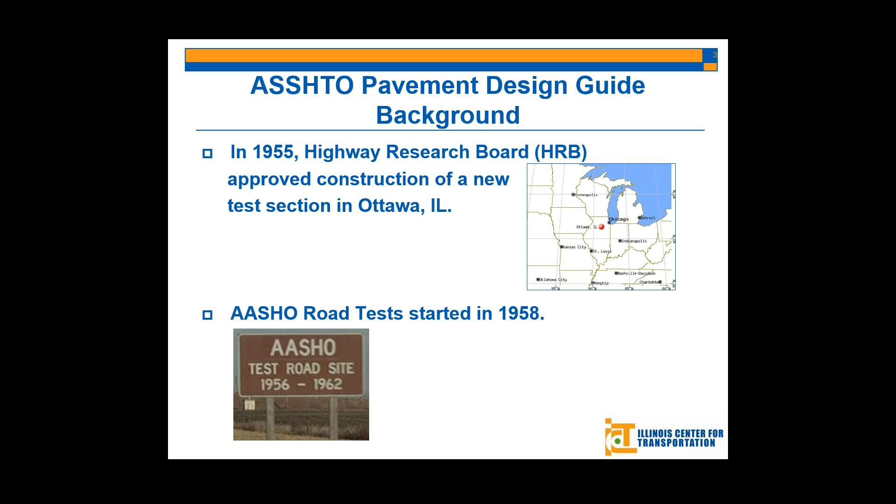Until the mid-20th century, the world was lacking published and comprehensive pavement design guidelines. Because of this, the Highway Research Board approved construction of a new test section in Ottawa, Illinois in 1955. Ottawa is north of Rantoul, somewhere between Rantoul and Chicago. This test section was opened to traffic in 1958, and testing started at the same time. Four design guides were developed based on the AASHO road tests.

The first design guide was the '61 interim guide. They then revisited and reviewed the '61 guide and published another one in '72. They again modified the equations given in the '72 interim guide and published another pavement design guide in '86 — so there were modifications between these three. For example, in '86 they started considering resilient modulus for subgrade in pavement design. Finally in '93 they finalized this and published the '93 AASHTO pavement design guide, which is still popular throughout the world and still used in a number of states in the United States.

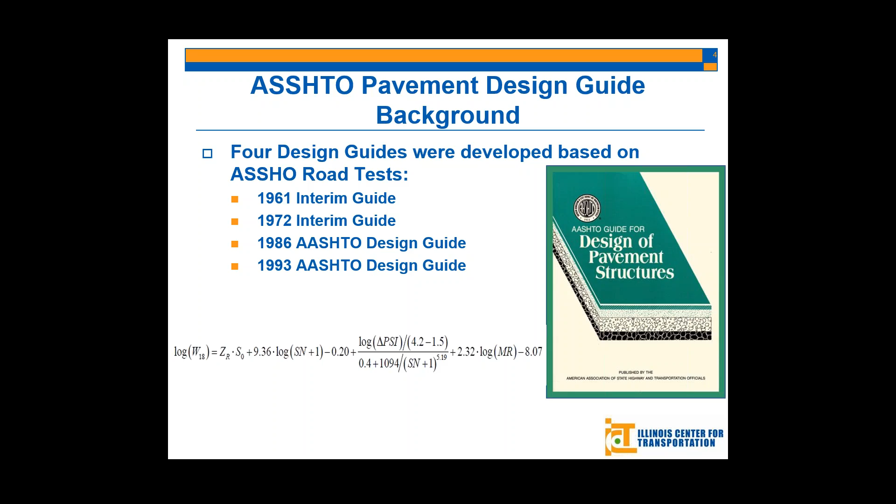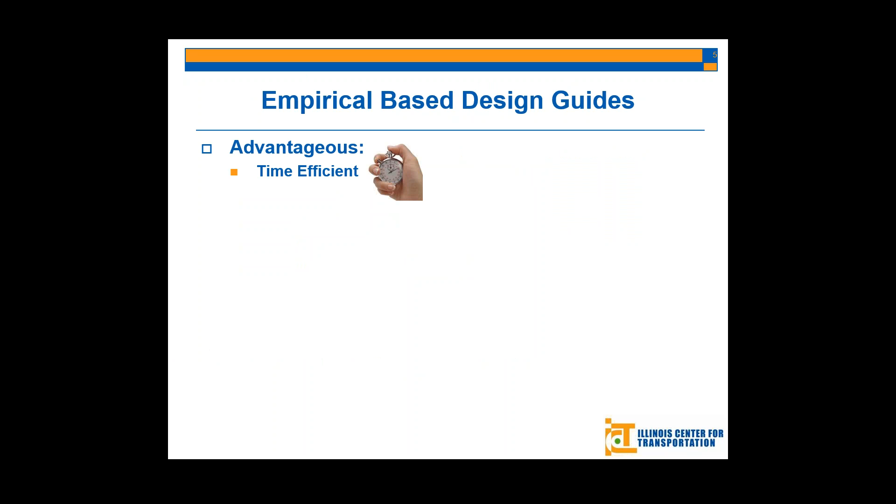So what are the advantages of using empirical-based design guides? First, they are very time efficient — you have only one equation, and considering the computer power we have today, it's very easy to solve. Second, they are very easy to implement and use, since there's only one equation with a couple of inputs.

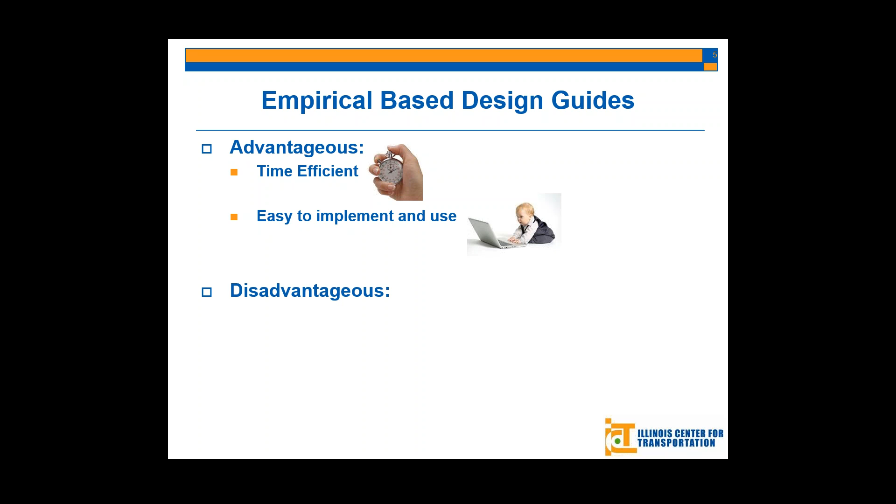But what are the disadvantages of these empirical-based design guides? Why are we trying to switch to mechanistic-based design guides? The reason is that they are applicable only to conditions similar to those for which they were developed. For example, if you conduct tests in one particular climate zone and want to make a new design in another climate zone, you are sort of doing extrapolation, which we want to avoid when doing pavement design.

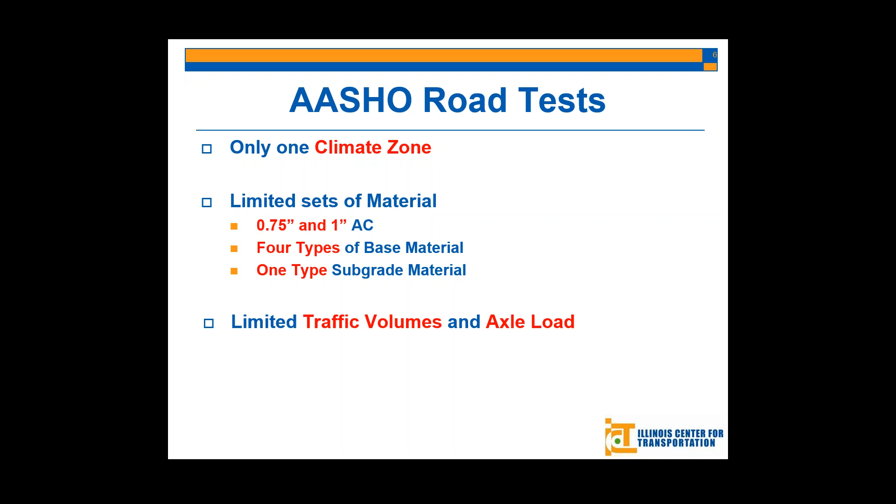Now I'd like to talk about the conditions that existed in the AASHO road tests. Obviously, it only considers one climate zone, the Illinois climate zone, and a very limited set of materials — only 0.75 inch and 1 inch asphalt layer thicknesses. When you consider the pavement designs we use today, you can tell we are extrapolating a lot. They also had only four different types of base material and only one type of material for subgrade, which was, I believe, A6 or A7, along with limiting traffic volumes. When you compare traffic volumes back in the 1960s to what we have now, there's a really big difference. Axle loads have increased, and new tire technologies have emerged — now we have wide-base tires in addition to dual tire assemblies, totally new construction methods, and so on.

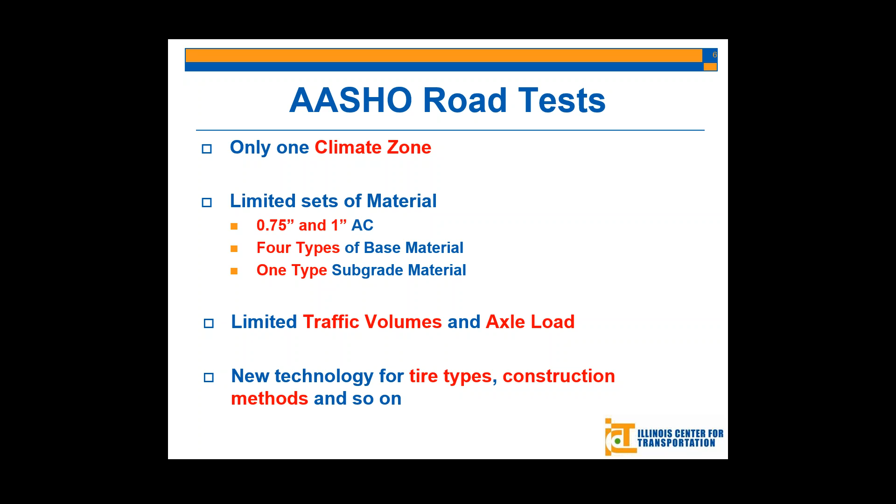This road test basically shows that the conditions in actual road tests were very limited, and most of the time that we are designing new pavement using this empirical based method, we are doing extrapolation that we want to avoid.

After this, new projects 1-40A, 1-40B, and 1-40D reviewed and revised the MEPDG, which resulted in new pavement design software, later known as Darwin ME, and an improved version of the existing MEPDG design guide called MEPDG and Manual of Practice. This design guide is mostly developed for developing computer software.

Finally, in August 2013, they changed the name to the AASHTO Pavement ME Design Software instead of Darwin ME. I'm hoping that they're going to stick with this name.

So after giving the brief history about MEPDG development, now I would like to talk about MEPDG itself. MEPDG stands for, as I said before, Mechanistic Empirical Design Guide. Mechanistic means that we are solving the pavement system by using theories, and then we are calculating the distresses by using some empirical equations.

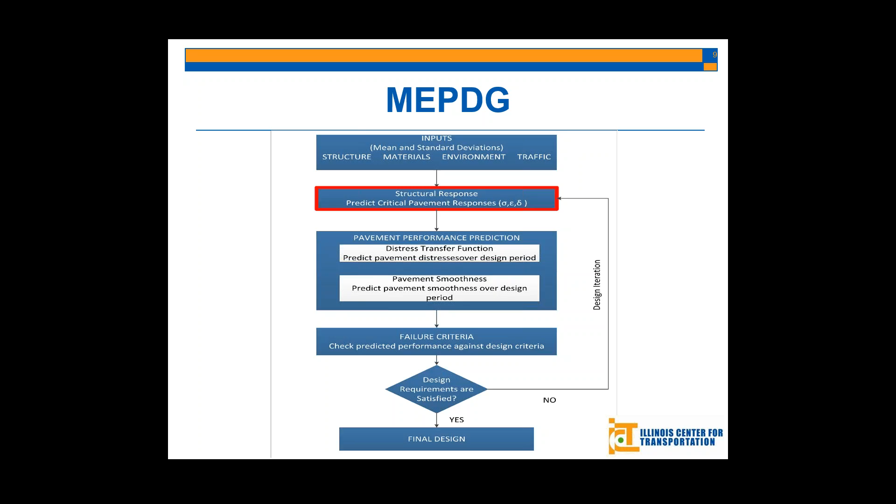MEPDG has really theoretically sound and grounded methodology and procedure to compute the structural responses, but still it has some limitations and unrealistic assumptions, which may lead to inaccurate response calculations. Before talking about the limitations of MEPDG, I would like to explain the mechanistic part of the design guide, how it works for flexible pavement, of course.

First, it starts with subdivision. Basically, you give your pavement structure to MEPDG - for example, 3 inches of AC layer, 6 inches of base layer, and so on - and it subdivides it into smaller pieces. The reason for this is to account for the temperature and aging gradients.

After this, dynamic modulus is calculated at the midpoint of each sub-layer, considering frequency and temperature. I would like to take your attention to the wording I have been using: the aging, frequency, and temperature. This should remind us of the term viscoelasticity, which means MEPDG recognizes the fact that asphalt concrete shows viscoelastic properties.

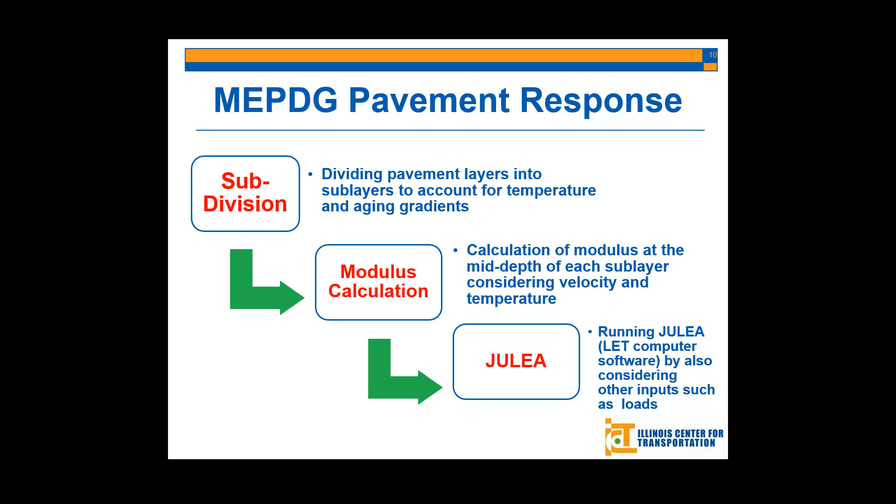After having our subdivided pavement structure with calculated modulus, it runs to JULEA, which is a linear elastic theory computer software - just like BISAR, just like KENLAYER, and so on - also considering other inputs such as loads. So the mechanistic part of the design guide is not only running JULEA; it subdivides, calculates the dynamic modulus, and after this, it runs JULEA. It has a really well and theoretically sound procedure to calculate pavement responses, but still it has some limitations.

I will talk about the limitations of MEPDG by comparing it with finite element analysis. First, analysis type: I said MEPDG implicitly considers viscoelasticity, but still it runs JULEA, which is linear elastic software, and it doesn't consider the motion of the tire. Basically, it assumes that the tire is steady and not moving, which is not real, of course.

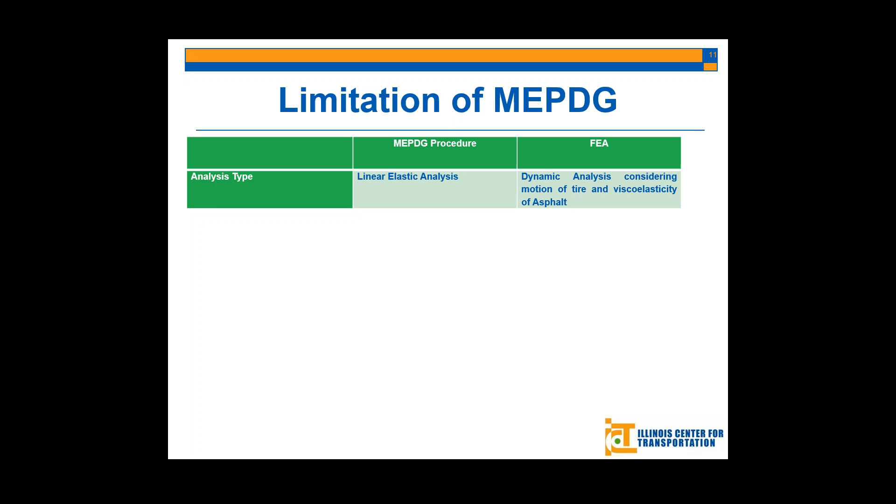As for tire type, because of the contact area it assumes, it can only consider a dual tire assembly - it cannot capture the wide-base tire effect on contact stresses. Contact stresses: it only assumes 2D uniform pressure, but in real life, the tire applies 3D contact stresses in vertical, longitudinal, and transverse directions, and these stresses are non-uniform. The contact area in MEPDG is assumed as circular.

Basically, it's calculated by dividing axle load by tire pressure. But in finite element analysis, our contact area is true measured tire contact areas.

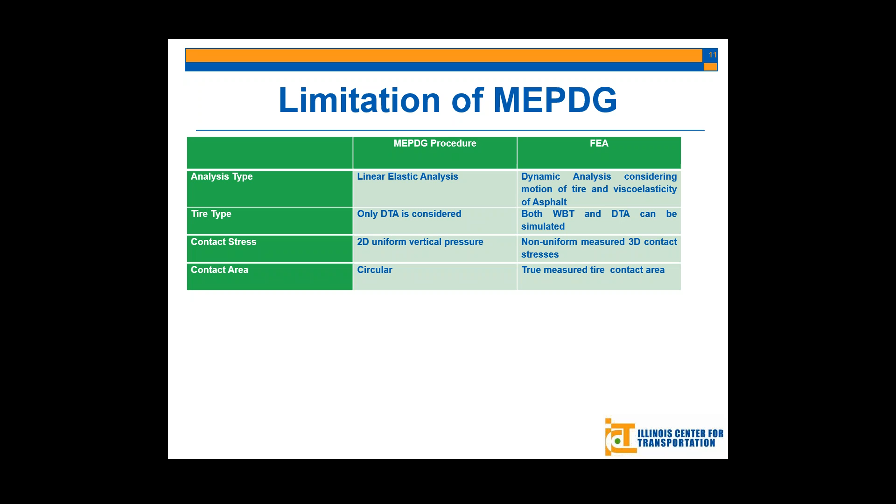Friction between layers in linear elastic theory: the MEPDG procedure assumes a distributed spring model to model the interaction between the layers. But in finite element analysis, we use an elastic stick model, which is able to simulate what is really happening at the interface between the layers.

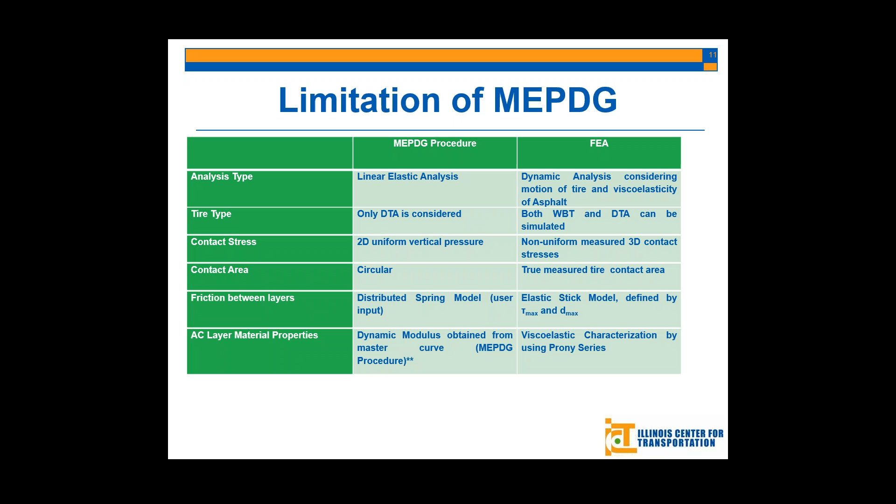Finally, the AC layer material properties also use a master curve, but to get the complex modulus you have to calculate the frequency, and MEPDG has a procedure to calculate frequency of loading. But as proved in two of Professor Al-Qadi's papers, this procedure to calculate loading frequency has some limitations, which result in up to 140% error.

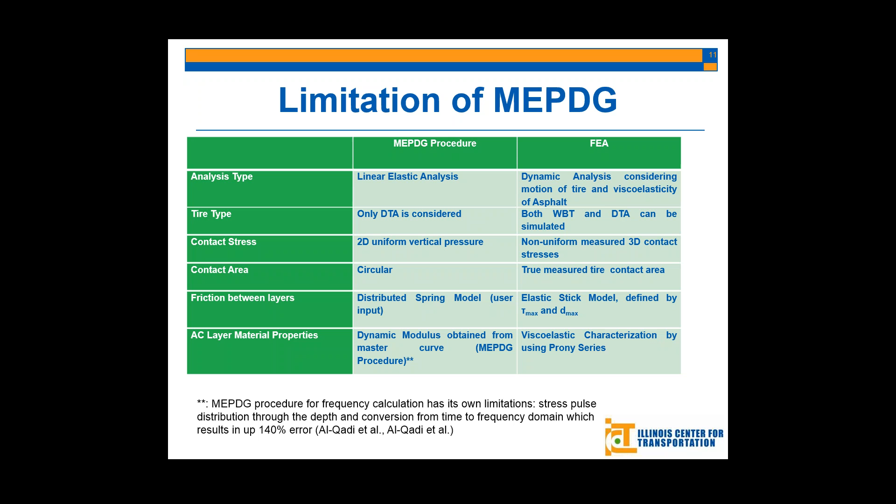So until this point, I tried to explain why we need to modify the mechanistic part of the pavement design by explaining the limitations of them.

Based on what I have just said, the objective of this study is to develop adjustment factors which modify the pavement responses obtained from the MEPDG procedure, in accordance with the results from finite element analysis, where we believe we model the tire-pavement interactions more realistically in terms of loading conditions and material characterization.

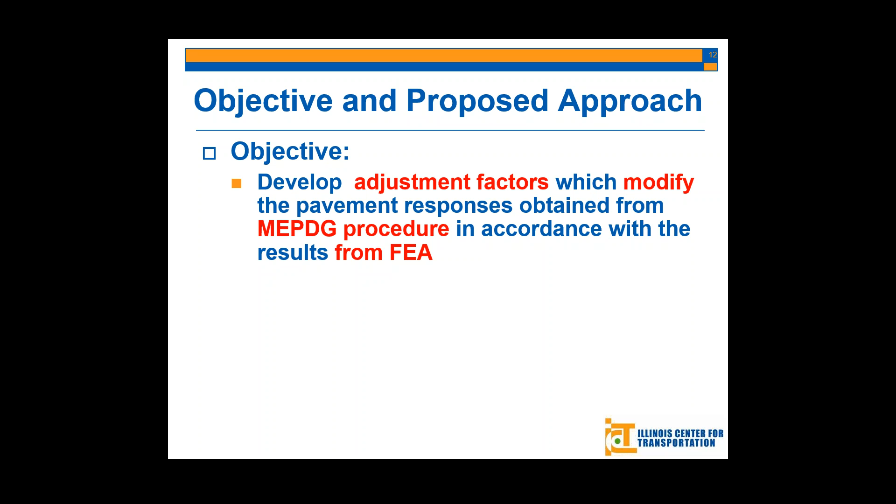Our approach divides the limitations into two groups: one for the model complexity regarding material characterization and loading condition, and the other for the incapability of simulating wide-base tires.

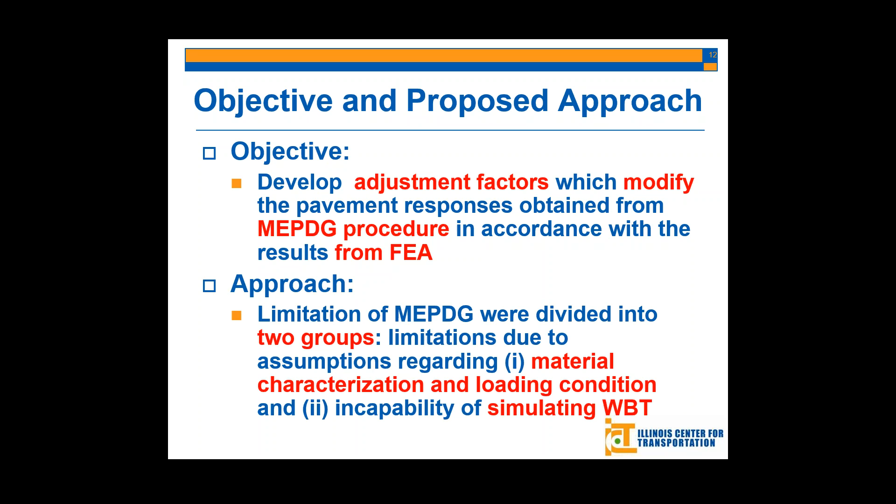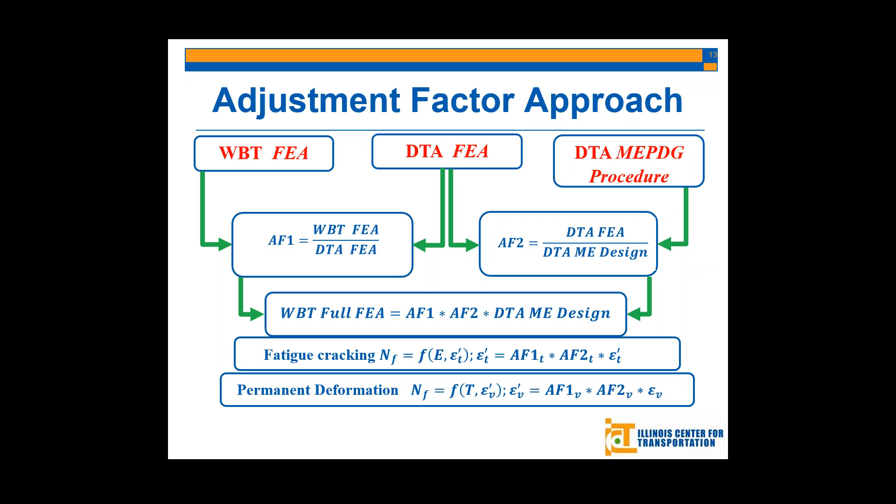Now I will start talking about the development of each adjustment factor, and share the discussions and results.

Before talking about adjustment factor one, I would like to take a moment to thank my research colleagues, Jaime and Angeli, because the finite element analyses were run by them.

I only implemented MEPDG and ran those cases in the MEPDG procedure.

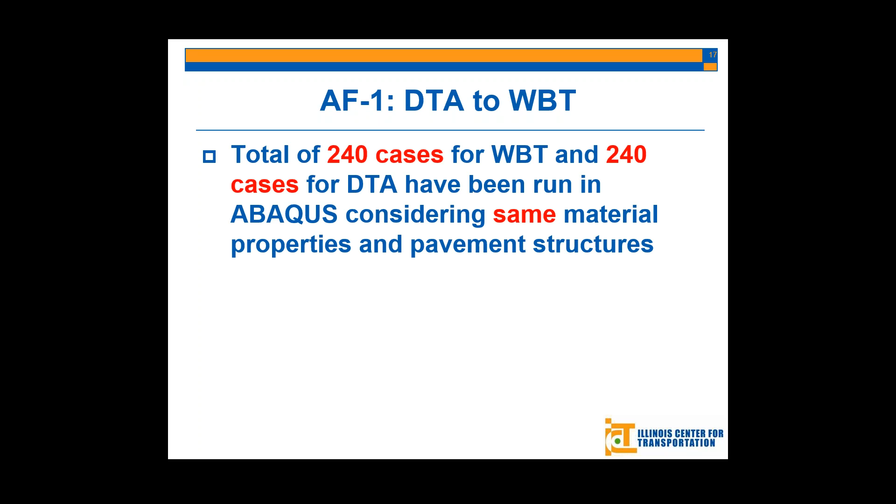A total of 240 cases for wide-base tire and dual tire assembly have been run in Abaqus, considering the same material properties and pavement structures. The only difference between these two cases is the contact stresses and contact areas, which were again measured under the same axle load and tire pressure.

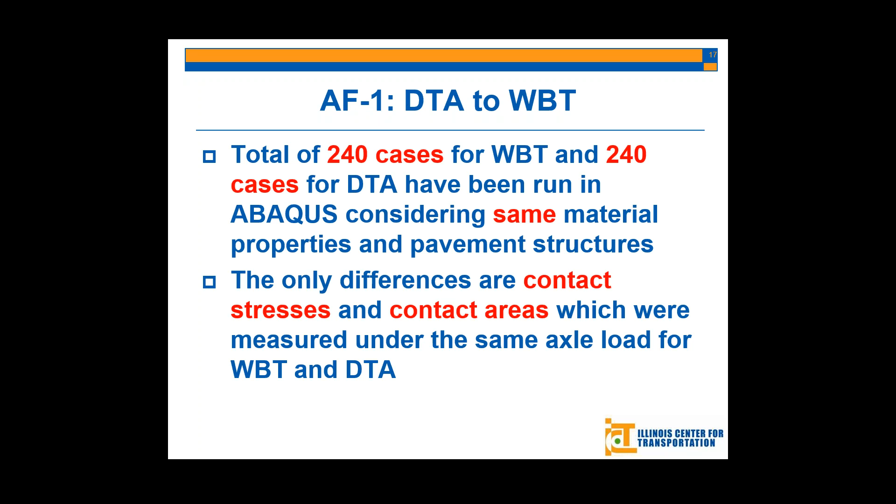Why do they result in different contact stresses? Because of the structural difference between dual tire assembly and wide-base tire.

We developed adjustment factors for a total of 8 responses: compressive strain within each layer, tensile strain at the bottom of AC, and shear strain within each layer. But because of time limitations, and for the sake of brevity, I will only be showing 4 of them.

This is transverse strain at the AC surface. The y-axis shows the wide-base tire, the x-axis shows the dual tire assembly. Here we have two lines: one orange, the other green.

The orange line is basically the unity line; it shows y equals x. I put this line to give you an idea of how significant it is to apply a correction factor on the response. In other words, this gap, this difference between the two lines, is the interpretation of the coefficient of x here.

So what I'm saying, for example, if you check the coefficient of x, you will understand that the wide-base tire is generally resulting in higher responses than the dual tire assembly, by a factor of about 1.5.

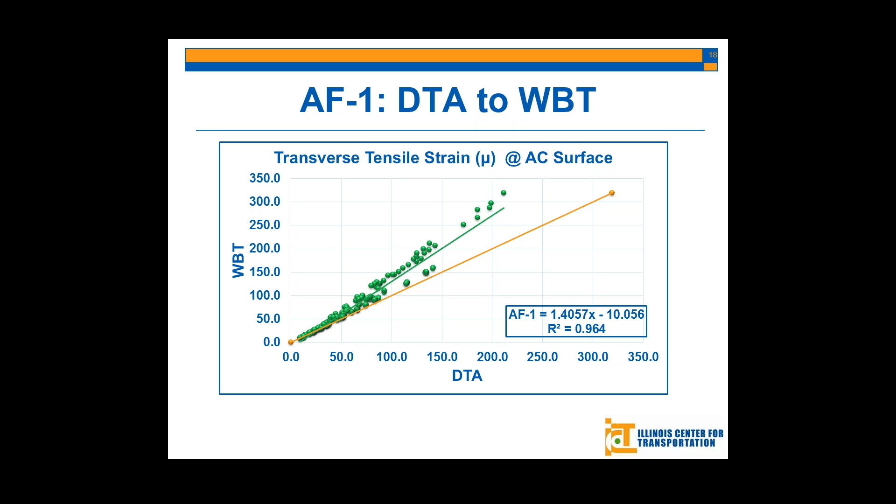This is because when you go deeper into the pavement, the effect of non-uniform tire contact stresses diminishes, and the axial load becomes the governing factor in responses. That's why we are getting higher and higher correlation between these two data sets, and the coefficient of x also decreases as we go deeper.

Again, the reason behind it is that when you go deeper in the pavement, the governing factor in responses becomes the axial load, which is the same for both cases. What differs between the two is the contact stress distribution, which loses its effect as you go deeper in the pavement.

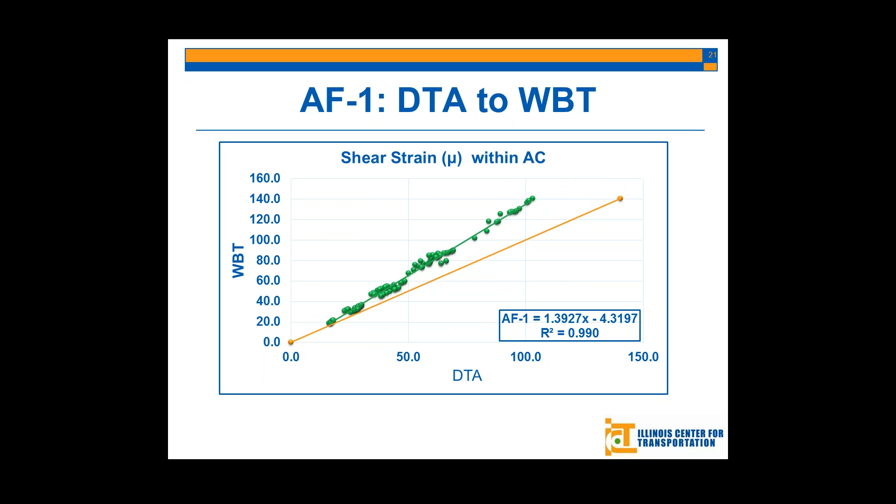And this is another demonstration of what I just said. This is the shear strain within the AC, which occurs 1 inch below the surface, and as you see, the correlation values dropped down, and the coefficients of x increased, comparing the compressive strain within the base. So this finalized my results about adjustment factor 1, which converts dual tire responses into the wide base tire responses.

Now I will be talking about MEPDG adjustment factor 2, which accounts for the model complexity. For this adjustment factor, only dual tire cases are considered, because once again, the wide base tire effect cannot be captured by the MEPDG.

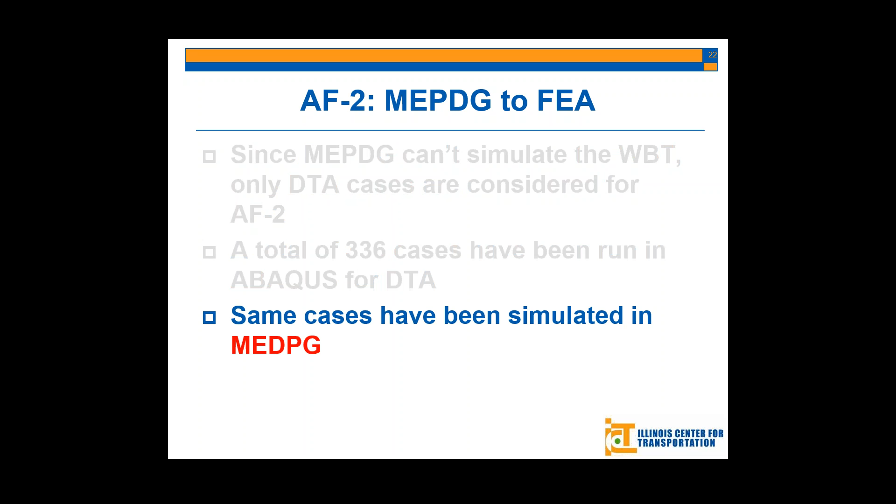A total of 336 cases have been run in Abaqus for dual tire assembly, and the same cases have been simulated in MEPDG. Here I want to say that running the same simulation in finite element and MEPDG is very important for the accuracy of this study, because we want to have consistent input between these two approaches so that we can compare apples to apples.

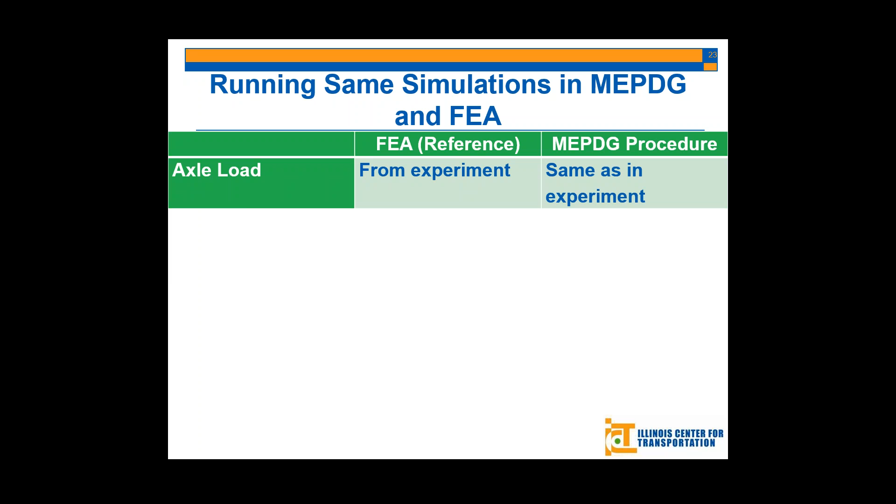What I am saying, for example, we have to apply the same axle load in finite element and the same axial load in MEPDG so that we can compare the results and come up with the adjustment factor. For axial load, when we are measuring contact stresses, we apply axial load and tire pressure, and we use this axial load and tire pressure as input in MEPDG. Contact area, for finite element analysis, is measured, and for MEPDG it's basically calculated by dividing axial load by the tire pressure.

Motion of tire: in finite element analysis, we are moving the tire at a velocity of 5 miles per hour, and we are considering the exact velocity when calculating complex modulus in MEPDG. Temperature: we use basically the same temperature profile in both finite element analysis and MEPDG.

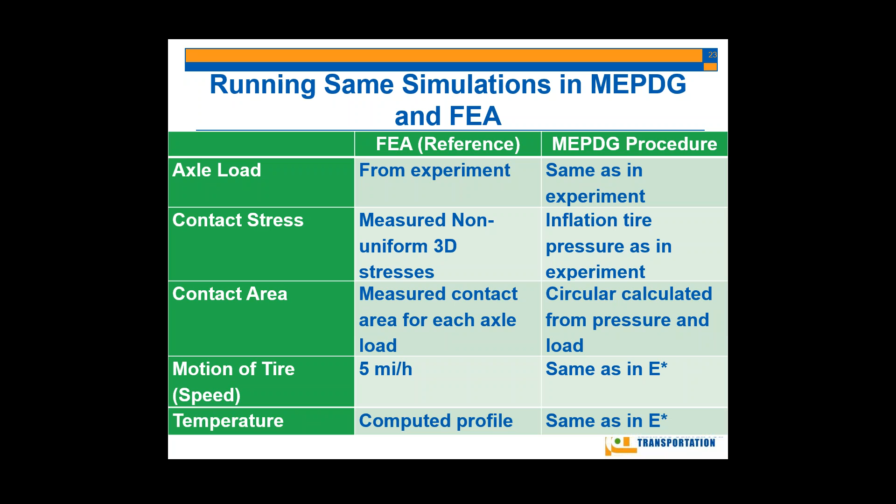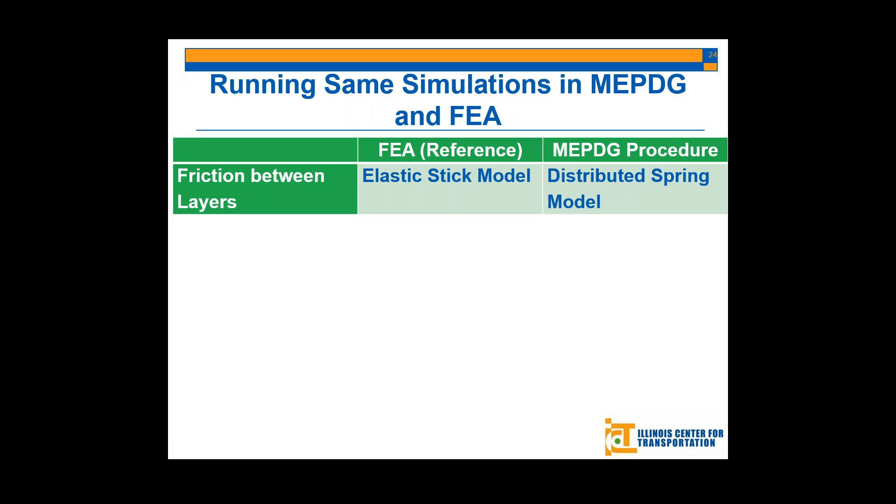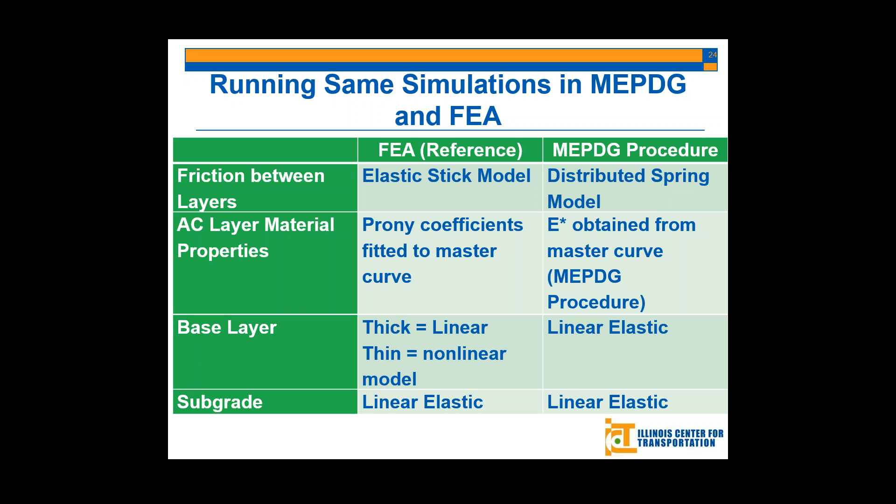That was the hardest conversion that I faced, converting the elastic stick model into the distributed spring model. I don't want to go into the details, but if you want, we can discuss it after the presentation. And the material properties, basically we use the same master curve and same linear elastic moduluses for base and subgrade.

So I was able to convert the finite element inputs to MEPDG, but the problem was I had two choices. One was using the AASHTOWare software to get the responses, and the other was implementing the MEPDG as a standalone code in my computer using computer languages. I chose to implement the MEPDG procedure as a standalone tool because of two reasons.

First of all, running 576 cases in the software is time consuming and not feasible. What I mean by not feasible: if you use the MEPDG software, you will see that it considers truck types, axle load spectra, and so on. But for the sake of this analysis, all I need is applying one axle load and one tire pressure.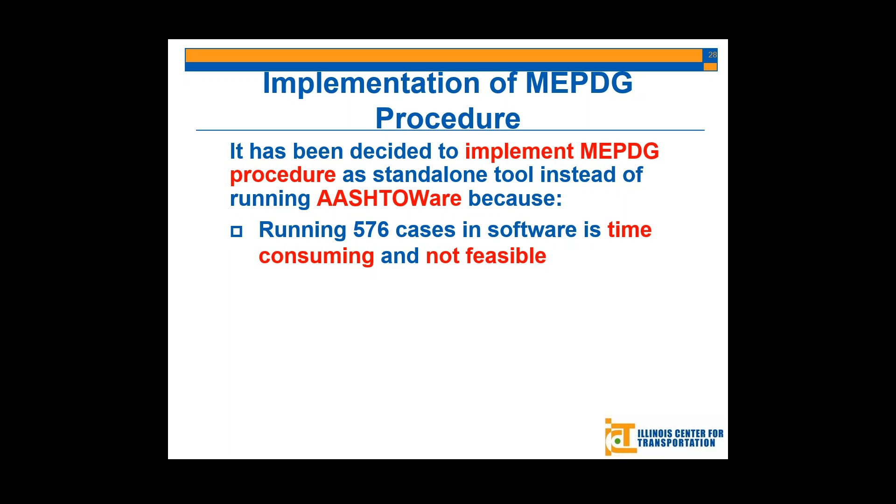So I don't need to go and get all this load spectra data for each truck type. And the second reason, which is more important, is that this software only gives the critical pavement responses used in transfer functions. However, we are also interested in other responses such as shear strain within the AC pavement layer, because it is believed in the literature that vertical shear strain might be the main cause of top-down cracking instead of the tensile strain at the AC surface.

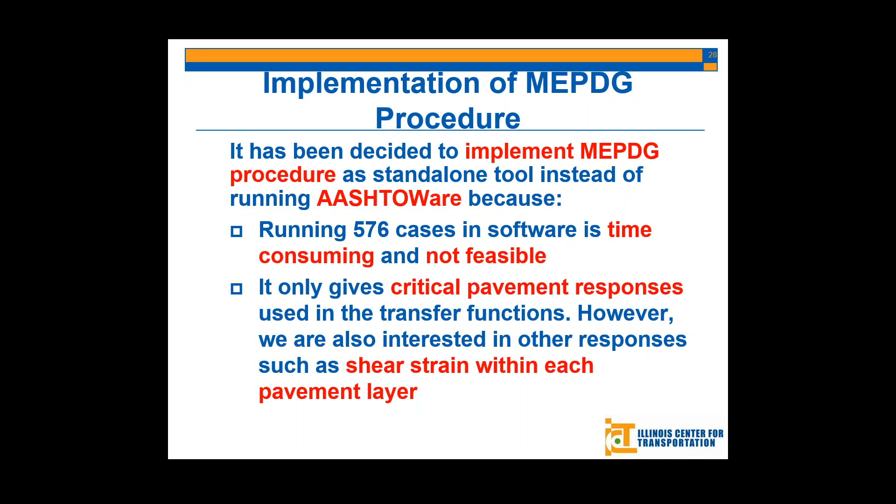So I implemented MEPDG as a standalone procedure tool, and I ran the simulation, and I faced some issues. The issues were differences in loading conditions, and in general the model introduced serious challenges that complicated the development of adjustment factor 2.

To obtain a statistically good correlation for adjustment factor 2, the cases were divided into thick pavement, thin pavement with strong base material, and thin pavement with weak base material. Now I would like to remind you that when I was developing adjustment factor 1, I didn't group the responses based on pavement structure like thin pavement, or based on material characterization such as strong and weak. But for developing adjustment factor 2, I had to do that because of the challenges introduced by the differences in models.

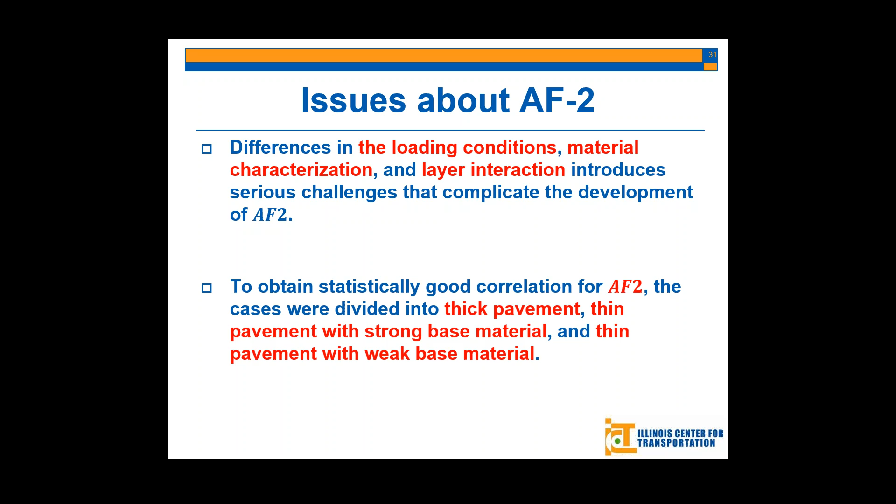Now I will show the adjustment factor 2 results. Again, I have in total like 30 plots for this adjustment factor 2, but I will be showing 4 or 5 of them.

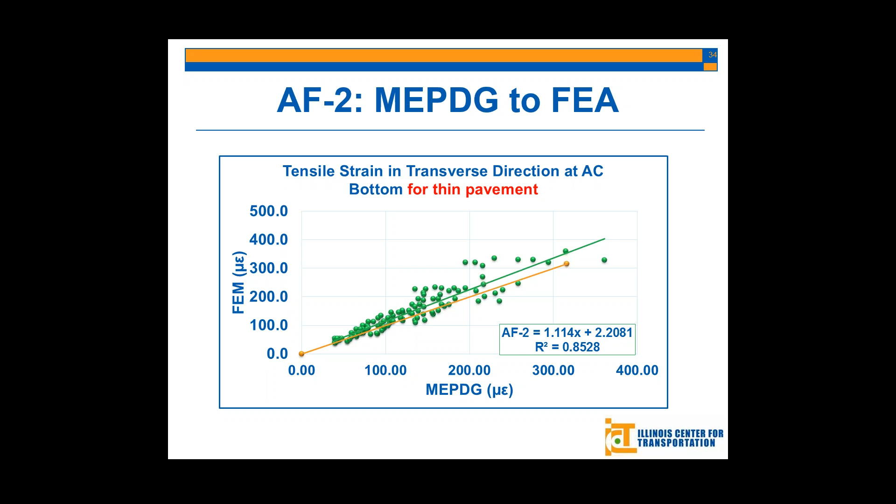Tensile strain - I have a very similar case for the thin pavement. The previous one was thick pavement, and this one is for thin pavement, and pretty much the same trend is observed. The only difference is a lower R-squared correlation value, again due to the effect of non-uniform contact stresses. This is the compressive strain within the base for the thick pavement. I have a relatively higher R-squared value here, because the governing factor in this response is axle load rather than contact stresses.

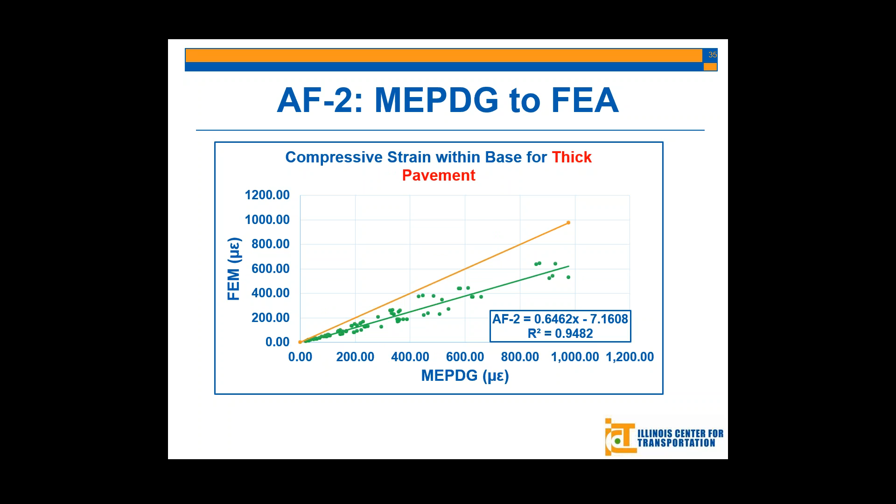This reminds me to mention something about our finite element analysis. For the thick pavement, we consider the base as a linear elastic material. On the other hand, for thin pavement, we consider it as a nonlinear material. I'd like to draw your attention to the coefficients here - before it was 0.65, meaning MEPDG resulted in higher responses than finite element analysis, but here it's 4, meaning finite element analysis results in 4 times higher responses than MEPDG. This also matches the literature, which states that considering the base as a nonlinear material results in higher responses compared to treating it as only linear elastic. These coefficients show the significance of considering base material as nonlinear.

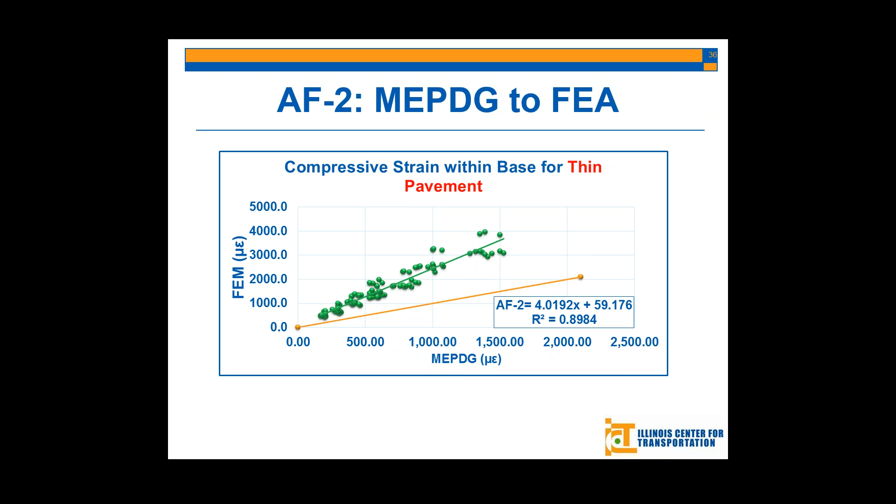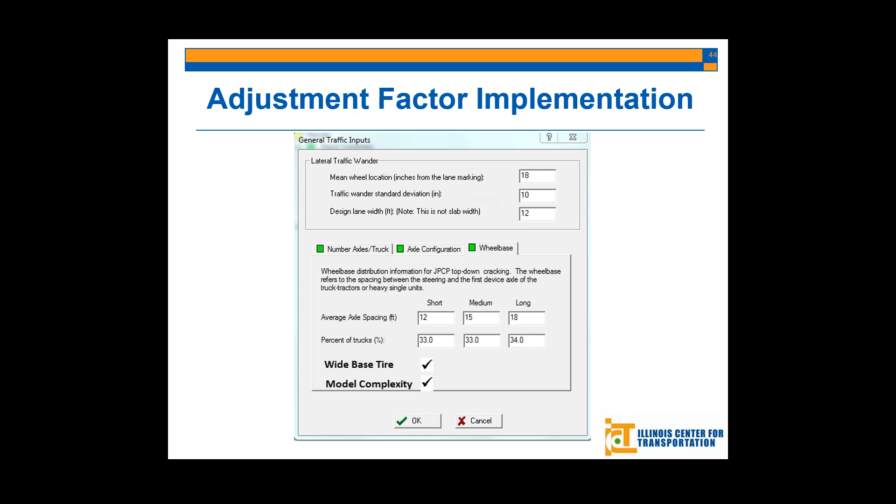Now I will quickly give my conclusions about my studies.

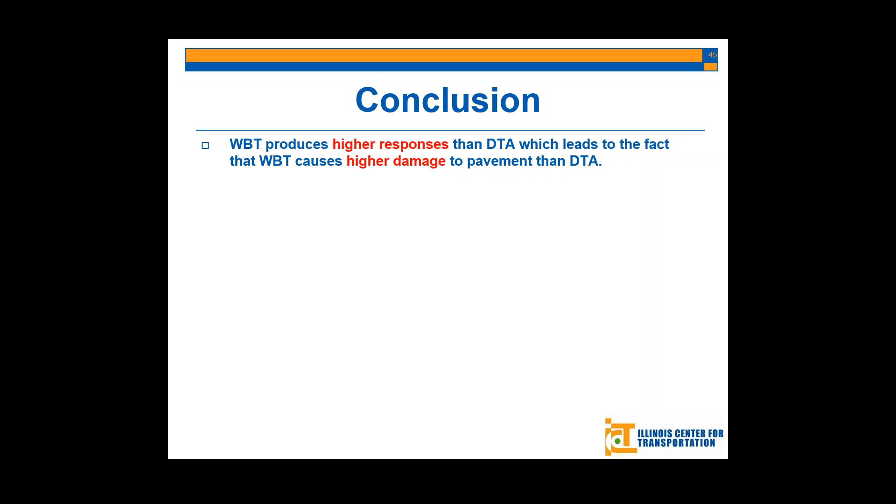We observed that for all the responses, wide base tire produces higher responses than dual tire assembly, which means that it gives higher damage than the dual tire assembly.

I don't know why it disappears. It doesn't disappear on my computer, but yeah, I can see it here. I don't know, it's fine, it's just the screen display. It's fine.

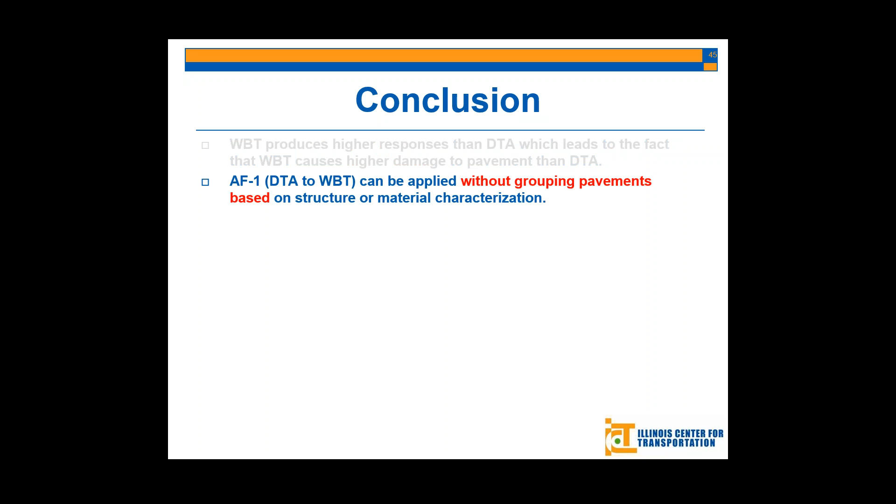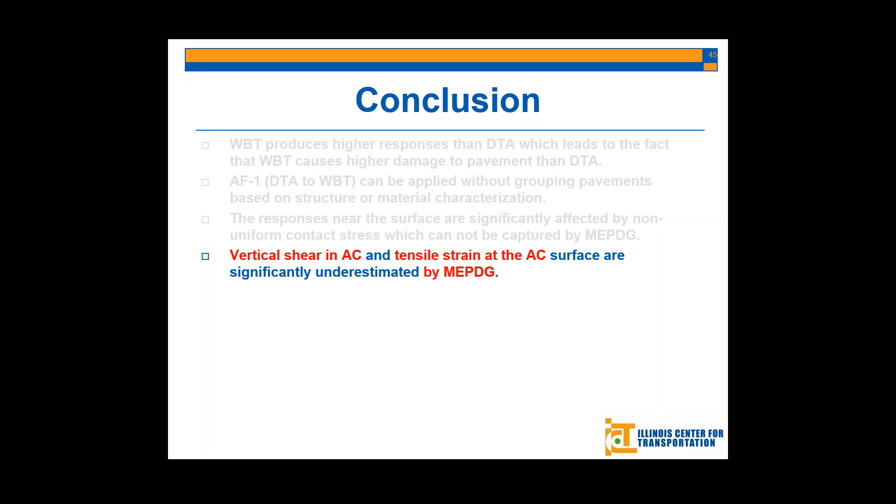Adjustment factor can be applied without grouping pavement based on structure and material because, as you see, I had very high correlation values. The responses near the surface are significantly affected by non-uniform contact stresses which cannot be captured by MEPDG. Vertical shear in AC and tensile strain at the AC surface are the responses which are significantly underestimated by MEPDG,

and these responses are important for us to predict top-down cracking. Considering nonlinear characterization for base material causes much higher responses.

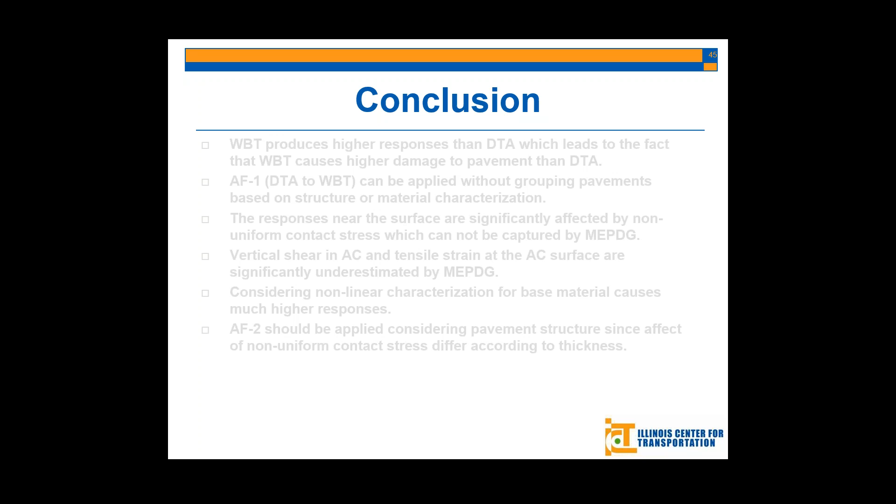And adjustment factor should be applied considering pavement structure, since the effect of non-uniform contact stresses differs according to thickness. I said this sentence maybe a thousand times, but it is really important for our studies. And if you have any questions, I will be happy to answer them.

I apologize if I was so fast. I don't know, it's my nature, I go so fast. Questions?

Yes, thank you, I have a couple questions. You only talked about transverse strain. Did you calculate longitudinal strain? Yes. For which case, Professor, specifically? Just in general, bottom of the asphalt longitudinal strain.

For wide base tire effect or model complexity effect? For wide base tire, it doesn't matter. Wide base tire always produces higher responses than dual tire assembly. And the strain's the same in both longitudinal and transverse? No, they are not. They are not the same.

So what's higher, transverse or longitudinal? I don't know. But you show... I guess maybe the plots you show are just a sample, is that what I'm understanding? Longitudinal, his question is... Okay, okay, that was my answer.

Okay, 'cause I always thought longitudinal was higher, and you're showing transverse. What's the answer again for everyone? I think, Erman, I don't think I can understand the question. Go back to it, it's been the beginning.

Why did you not present horizontal strains? I think the question is longitudinal. I mean, longitudinal strains, I selected like one strain at the bottom of AC. I didn't have a specific reason not to present longitudinal. Oh, okay, I could have presented it.

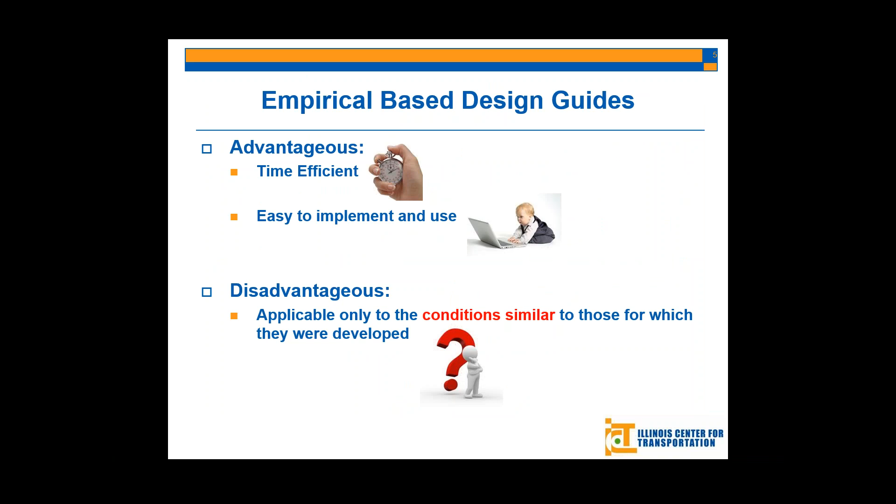Which one is more critical? Basically, MEPDG gets whichever is higher. It calculates both, and whichever is higher, it uses. Generally, you get longitudinal, but sometimes you get the transverse in some occasions. We have both, like in our project, but I didn't put everything here.

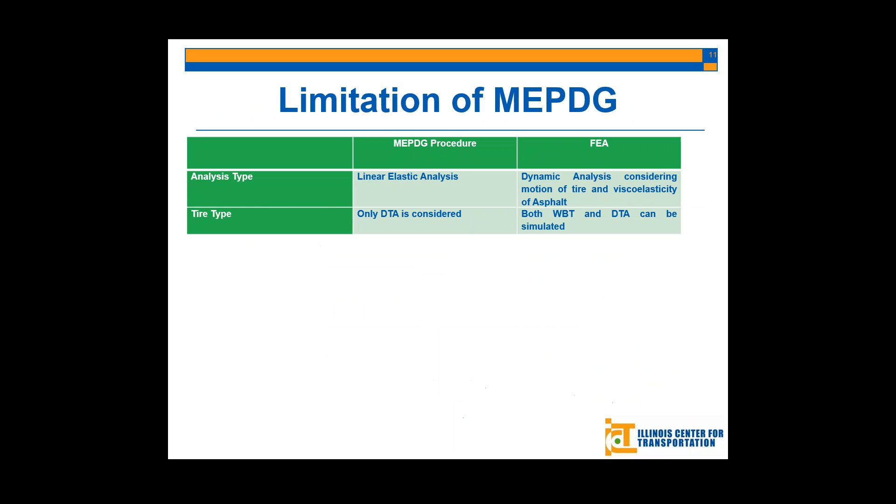That's fine, so you weren't just showing the worst case scenario, that's why I got confused. Oh, maybe, yes, maybe. Did you compare any of this with standard single row tires? No, we only did dual tires with wide base, yes.

So you were talking about the steering wheel? Yeah, or just any, maybe they don't have... We considered only dual tire assemblies, and we didn't consider wide base tire, which is a single tire in MEPDG, because we know that the contact stress difference caused by wide base tire cannot be captured by linear elastic theory.

So I don't know, what you're talking about is outside the scope of this research. Okay, what Michelin does, we have varying tire parameters for that, yeah. That answer, we did steering wheel, but it wasn't part of this work, yes. I guess the main emphasis then was how wide-based tire, as opposed to the traditional dual which is used in design calculations, right? Yes, it's comparing.

You have kind of a narrow scope right now. Okay, I did have one other question, sorry. You said the tensile strain at the surface was primarily not correct because of layered elastic numerical analysis, was that it?

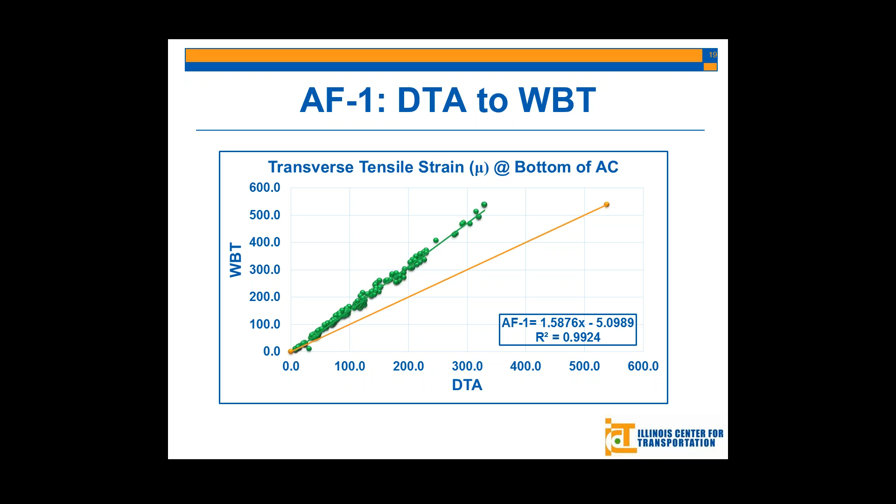So let me put the question in a different way, if I may. If you're going to have like a helicopter picture from the top here and look at it and say, okay, which one's going to be performing better, the thin pavement or thick pavement, when they are exposed to a wide-base tire? Thick pavement. And the reason?

First of all, thin pavement, as I showed, because of nonlinear characterization, it results in higher compressive strain in the base, which increases the rutting, which is one of the biggest problems. The comparison of tensile strain at the surface and at the bottom of AC is not as clear, because thick pavement results in higher response at the bottom of AC, but on the other hand, thin pavement results in higher responses at the AC surface. So, considering the compressive strain within the base, I would say thick pavement will show better performance than thin pavement.

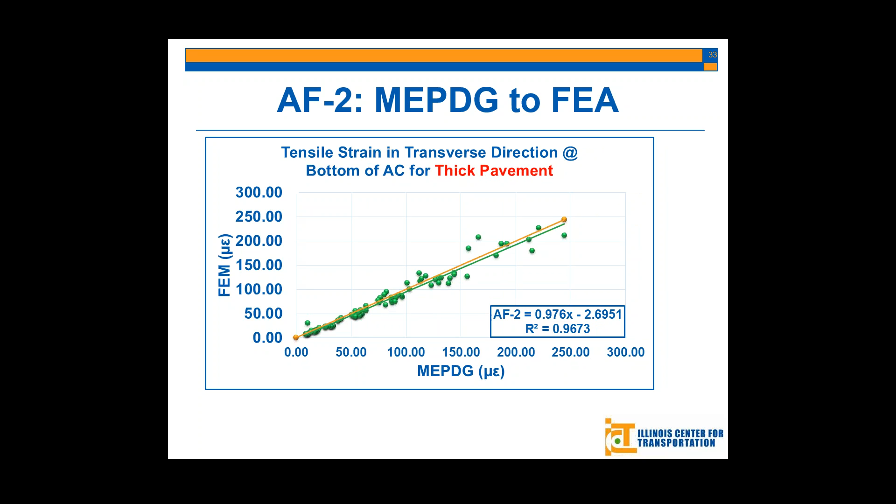There's a complete different structure for both tires. We are measuring the tire contact stresses, and that's what we are applying, and it's the same for thick and thin pavement. But remember, the contact stresses you have are different between wide base tire and dual tire. So what we are using is what we are measuring. Wide base tire in general has less tendency to have surface cracks and shear happening.

I would say, correct me Jaime, about 10%? You did a thick one. It's maybe 10% for the surface tensile strain and the vertical shear strain close to the surface. From all the previous ones, yeah, something like this. It depends, of course, on the pressure and the load and so on, but in general, I'm saying 10%.

One other thing, I guess, with all the dynamic finite element analysis and the detail with the contact stresses, how do you bring some of those conclusions into building or developing adjustment factors for MEPDG to take care of wide base? If you're basically counting all model complexities in one adjustment factor, there may be several changes needed to MEPDG. That's complete.

If I may, he touched on very important points from the beginning. First, that MEPDG uses the circular load, uniform pressure, all these things, so you cannot address them all one by one. That's why the idea of two adjustment factors: one for the wide base, and one between finite element and the elastic method.

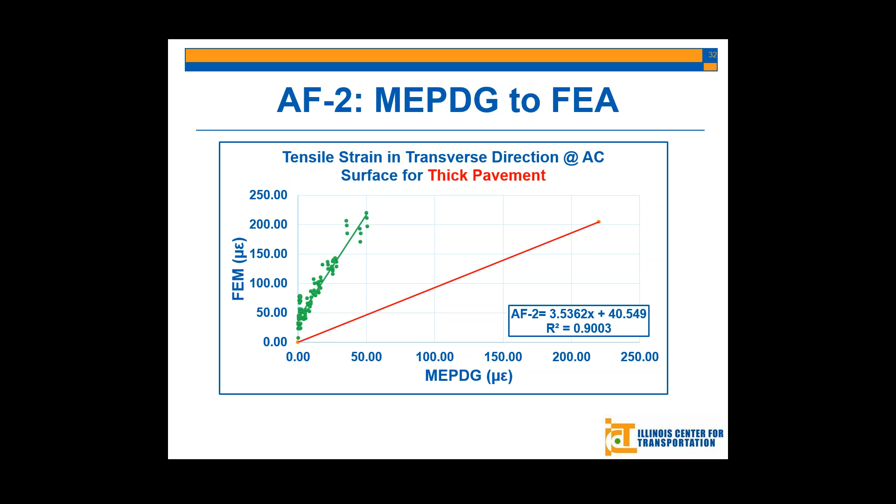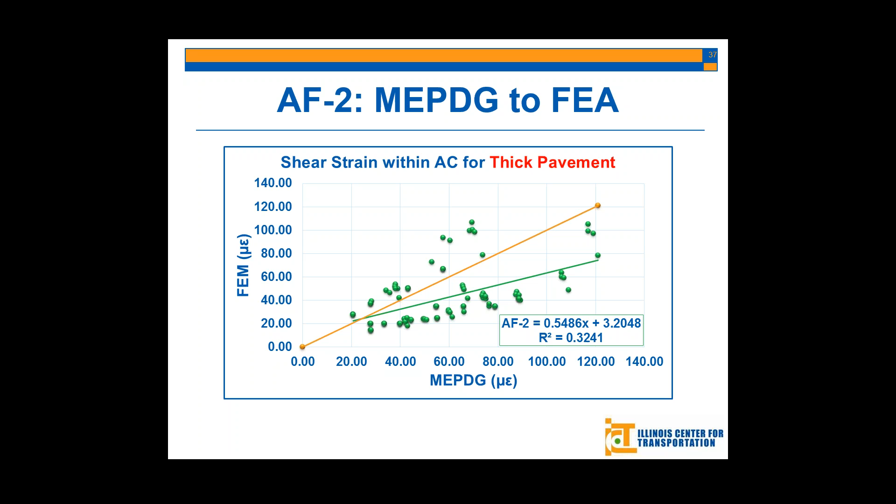So, any other questions? Just one thing of interest to you, Errol. Sure.

Erman was discussing this with me about a week ago. If you remember in the Tensar project, we were looking into the strain readings where, whenever you have a very thin pavement and very weak subgrade, the response we were getting was way, way more than what we expected from the finite element. You mean what we measured? Yes, and this kind of change diminished as we moved to a thicker pavement, even including the ones here at that time. The only explanation is, I don't know how much trust we can have in the strain gauge measurements on thin pavements over weak subgrade, because the gauge was bending more than stretching, and they weren't manufactured to bend. So anyway.

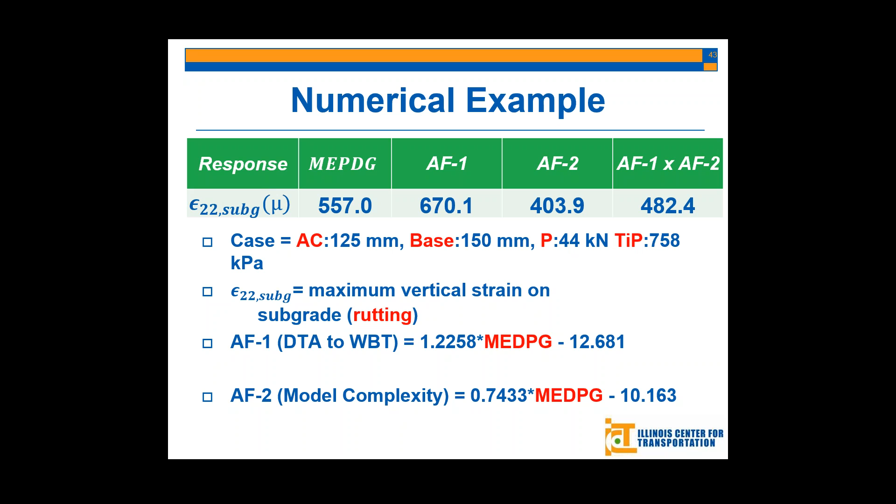All right, but any other questions before you leave today? There was a big plan from Angela's parents to have her born on April Fools' Day, April 1st, but it didn't work out. She refused to come on April 1st and came on April 2nd instead. So today is Angela's birthday, so we have some cupcakes, courtesy of Jaime. Happy birthday, Angela! Thank you.

Now, she is, now Erman's looking